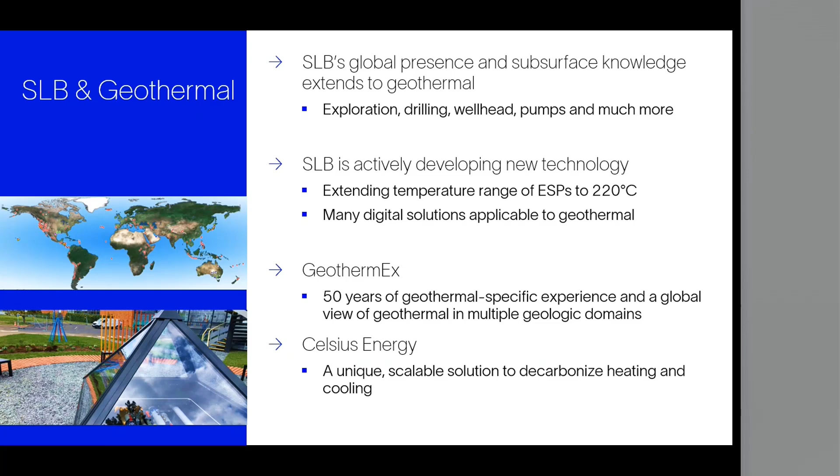We have a sort of sister company that spun up a different way. It was started by some Schlumberger employees, called Celsius Energy. I mention them because they've been working on the shallow side of geothermal, whereas GeothermEx has traditionally, historically, been more focused on the deep.

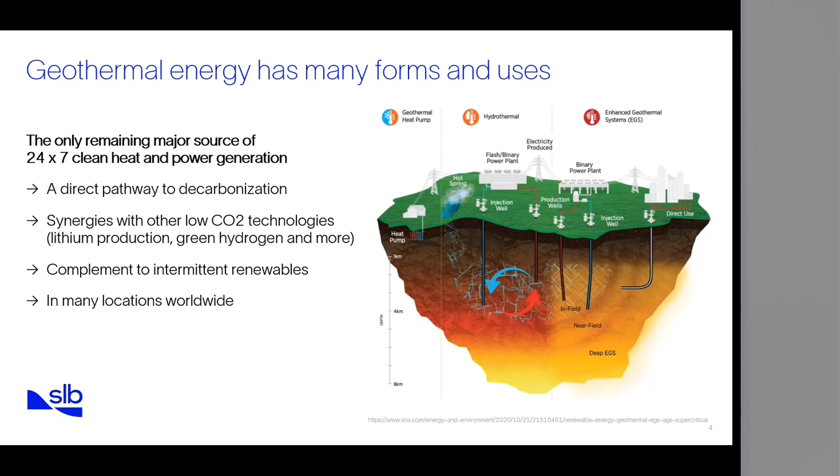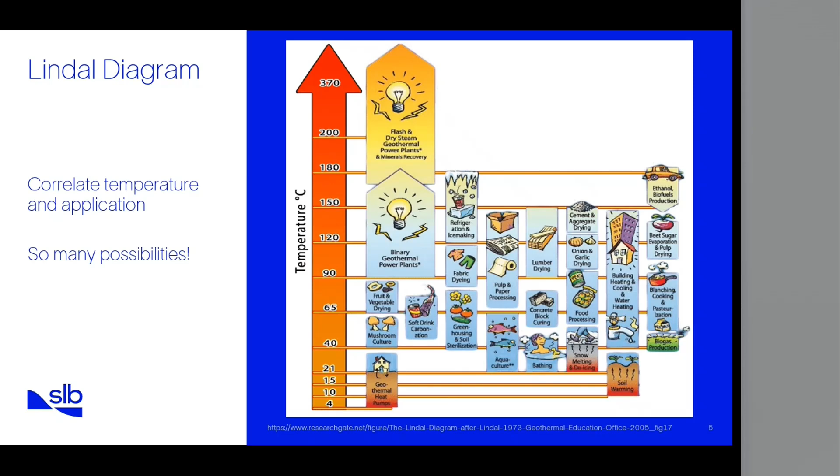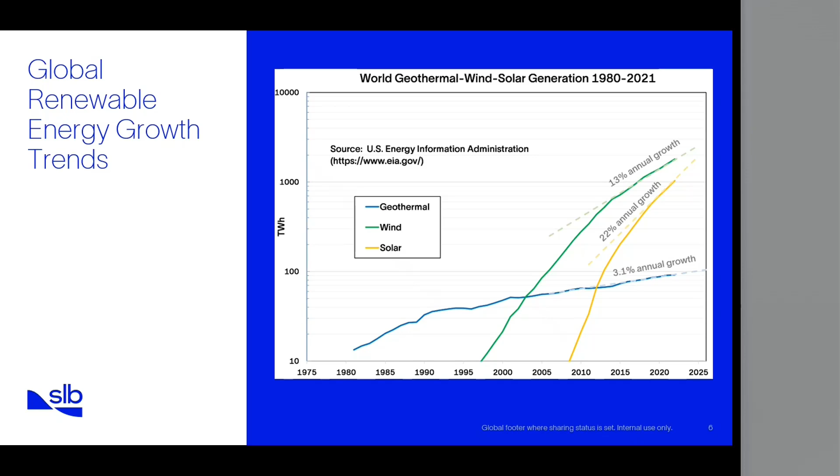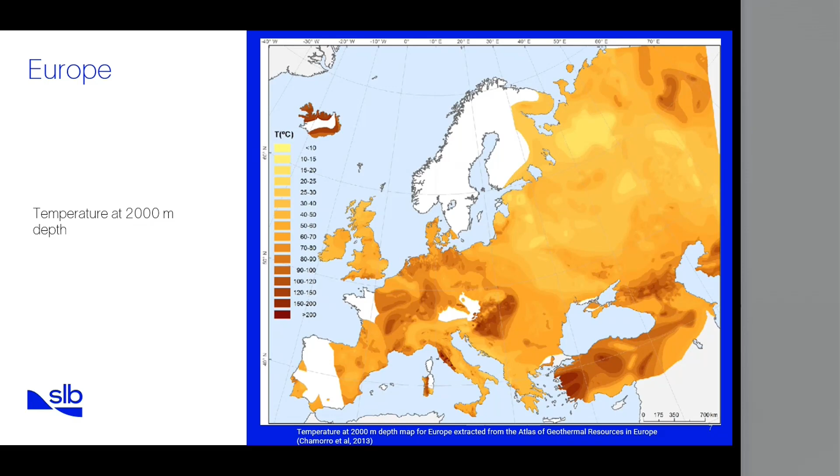So it's about the same rocks. We're not dissimilar from the continent, and yet when it comes to legislation, what we have seen is that our neighbors have taken some really bold actions to enable geothermal development.

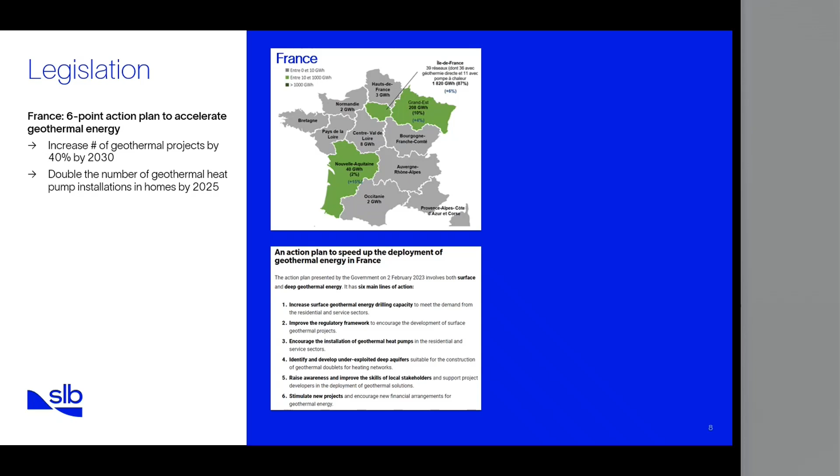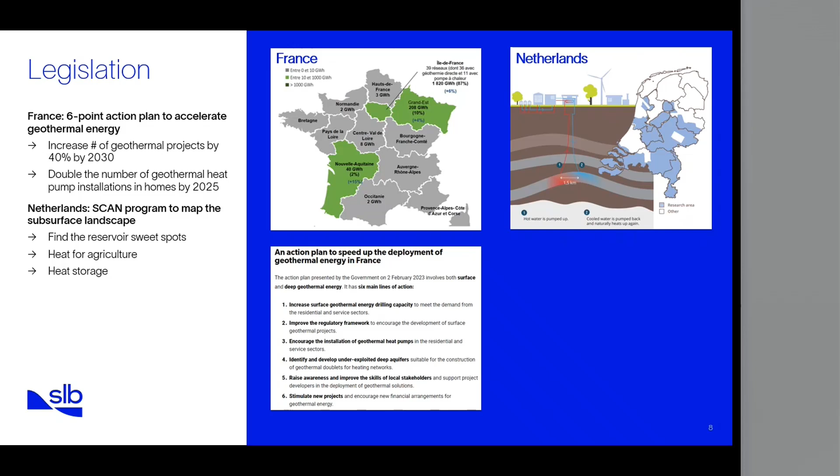In the Netherlands, that's another country that has been really active, doing a lot of geothermal development. This is showing the SCAN program, a seismic campaign of the Netherlands, where they first did a nationwide study and found some reservoirs, some geologic units they thought would be good reservoirs. They did some testing, and now they're doing mapping to find where those sweet spots are, with the intention of using that heat for agriculture and storage. They're very organized.

Germany also has committed to generate 50% of heat in a climate neutral way by 2030, and they have this 100 new projects program, in addition to already having quite a few projects on the go. This 100-well project is getting a lot of attention.

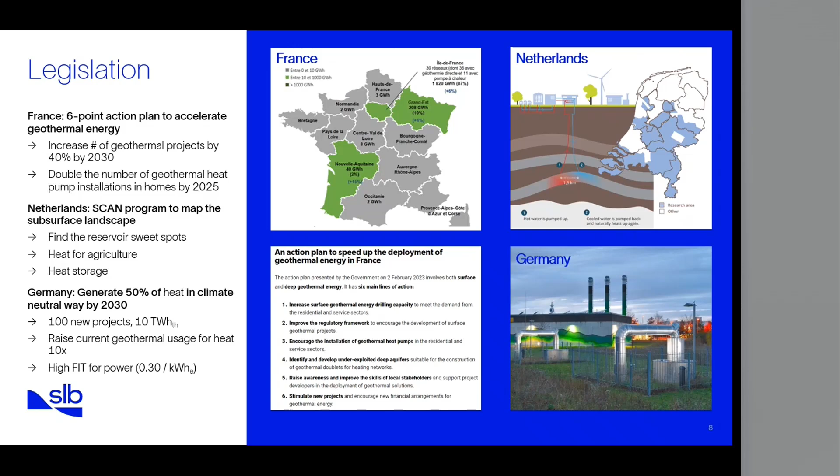So here in the UK, the legislation—we haven't seen those same things, at least not yet. What we're looking at here is just standing back, looking at the island and the subsurface temperature at 1 kilometer depth, and then the heat flow of the same area. What you're seeing here is the temperature variation through the island, but the heat flow is what jumps out, which is actually the change of rock type.

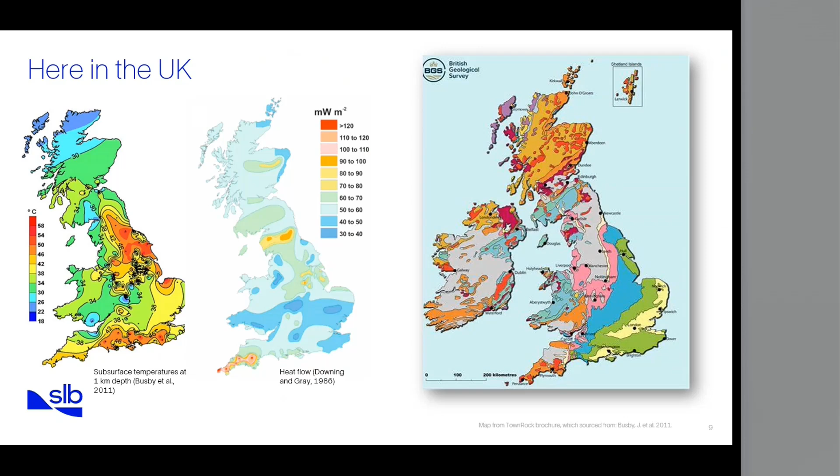That's where you have high heat flows in the granites. So the Cornish Peninsula has a high heat flow, as does the north of England and up in Scotland a bit. Then the geologic map by BGS is next to it, so you can cross your eyes and see that the units match up. You have the sedimentary basins mainly in the middle, central and southern England, and then the granites down south and up above.

So just a little bit—this is an incomplete history of the topic in the UK, but what I want to point out is that over the 50 years, what was driving a lot of activity from the late 70s through the mid-90s was this hot dry rocks program, funded by the UK Department of Energy, which is now no longer in existence.

That Department of Energy actually worked with the US Department of Energy, and they had this big program in Cornwall to experiment with drilling geothermal wells, injecting cold fluid, and seeing the response in a nearby producing well, doing a lot of experimentation with that. During that time is when the first, and still only, district heating system in the UK was established—the Southampton Geothermal Heating Company, which is still going today apparently.

Then you can see there's just this dead zone from the mid-90s through the late 2000s, which is where wind and solar, everything was taking off. Nobody really seemed to care about geothermal, but then things started to pick up again.

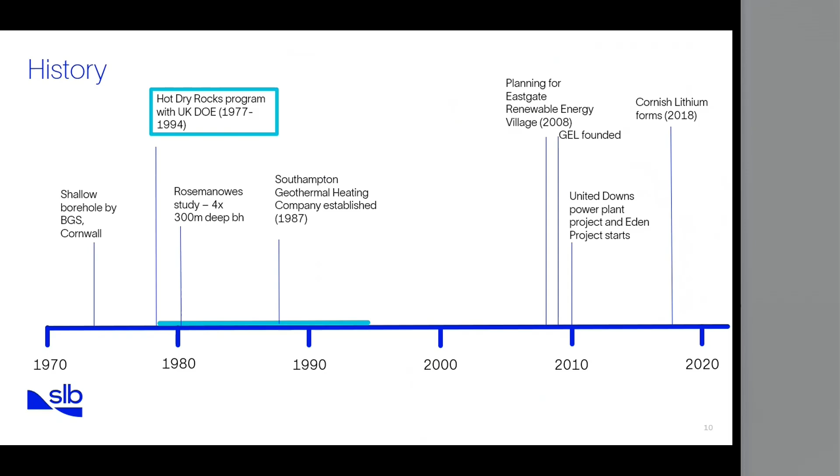Now we get into the true signs of life, where we have the lithium brines. I mention this first because it has gotten the most excitement, the most publicity, and there's a lot of energy around it. It's a really exciting frontier, especially in the context of energy security and the move to electrify everything. It's a crossroads of a bunch of different factors coming together.

So we see activity with geothermal lithium in geothermal brines down in Cornwall, also up in the north of England. And then there's always this knowledge sharing that goes back and forth with the Rhine Graben, which is between Germany and France.

A lot of the projects go back to the Hot Dry Rocks days, because that program ended up moving to the Rhine Graben. So the expertise with brines and geothermal in this type of granitic setting has been kept alive and incubated over in Europe, and now we're getting it going here in England.

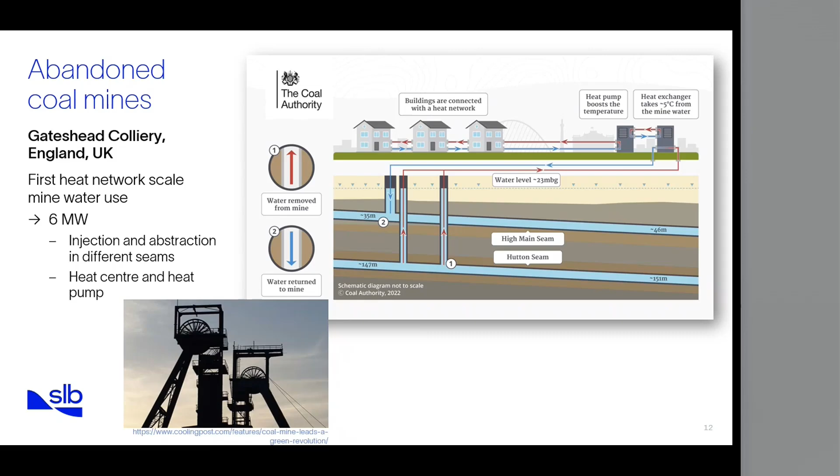I found out that they've started a second project up in Sunderland at the football stadium, where there happens to be an abandoned mine just on the grounds. So they've started this heat network at scale using this old mine water.

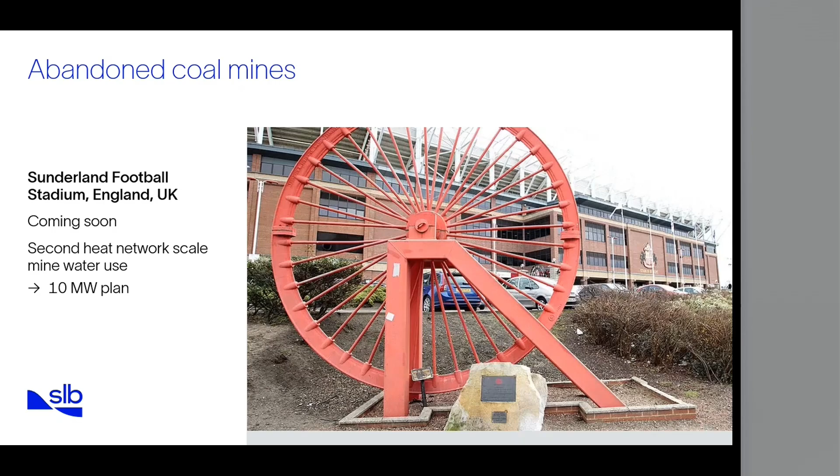Along the same mine water knowledge base, one of the PhD students developed this map of Scotland, and it's just been published. Even though we know about the Gateshead colliery and the Sunderland one that's coming, this is actually taking it to scale.

How many mines are there? Where is the water level? How easy is it going to be to make it useful? I'm also told that the Welsh government approached the Coal Authority to do the same thing in Wales. So that's quite exciting, and that's the mining story.

Then we also have a bunch of development over in the hydrocarbon world, the old oil and gas sector of the UK, where most of the expertise and activity is really on the offshore oil and gas, but there's actually a bit onshore. I've listed some of the companies who've been active in this sector, and what they're focused on is repurposing oil and gas wells.

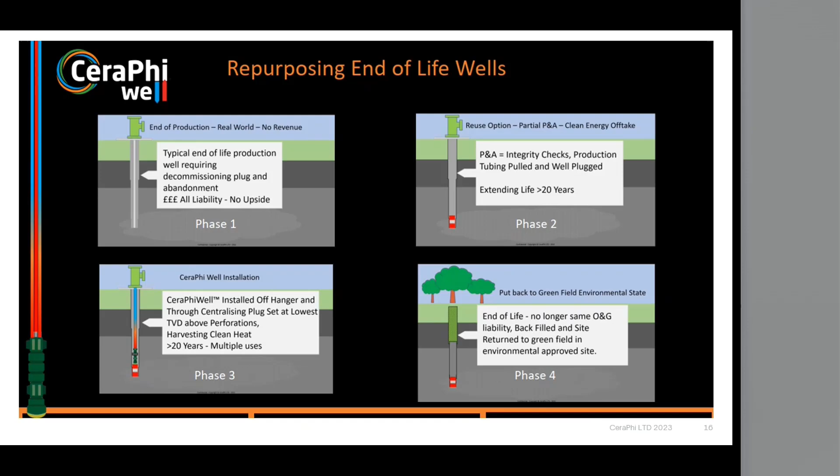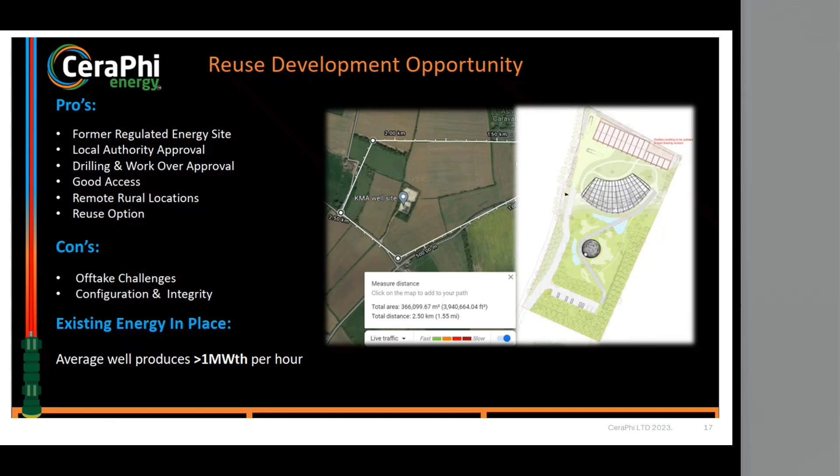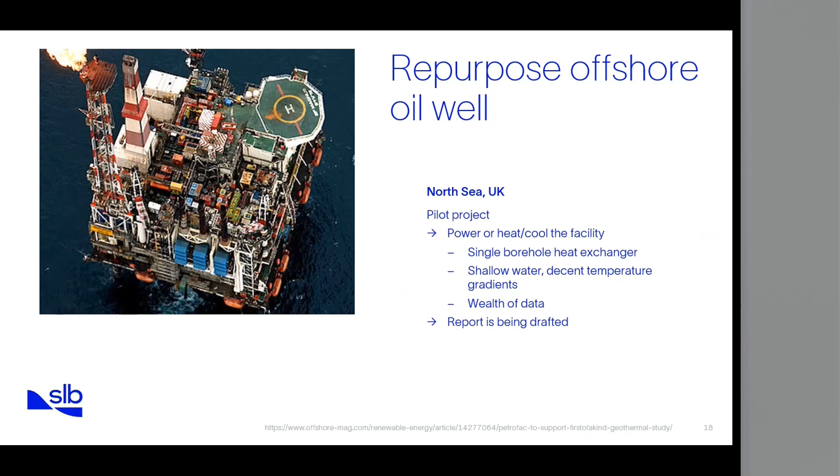So this model is really interesting, and they have some field trials going on right now somewhere in England. So this is definitely a sign of life. It's this whole direction of repurposing hydrocarbon wells. There's also this idea of repurposing offshore oil wells, to see if it works, maybe provide power or heat and cool the facility itself, even though it would also be producing oil from its wells, but convert one of the wells to geothermal. So that's a live pilot project right now in the North Sea.

Outside of those two industries I mentioned, we also have government bodies of science and innovation, like the British Geological Survey, where they're doing important things too. They just did this mapping project where they found all of the, I don't remember exactly how they did it, but they mapped the Carboniferous limestones, because they believe that's similar to the Dutch example, where they honed in on this particular reservoir, tracking this unit across the country and finding the sweet spots where this layer is at the right depth to have the right conditions to exploit. That's what it sounds like the BGS is doing right now, which is really exciting.

And they are just in the final stages of publishing this UK Deep Geothermal Energy White Paper, so that's kind of a coming soon thing. And thirdly, they're reworking legacy data sets. This is really important, and it's another trend we see, another powerful avenue to pursue that's going to require geoscientific knowledge.

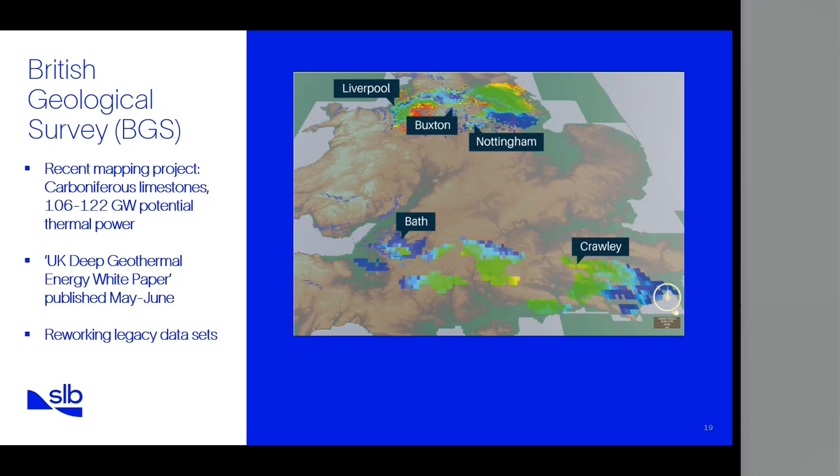In addition to BGS, we also have these UK geoenergy observatories scattered around. There's two main ones: the one up in Glasgow, which has 12 boreholes, and then the Cheshire site. And then there's something in Cardiff that's more focused on urban geothermal heat exchangers and the water flow in an urban setting with regards to geothermal heat recovery. So that's also cool.

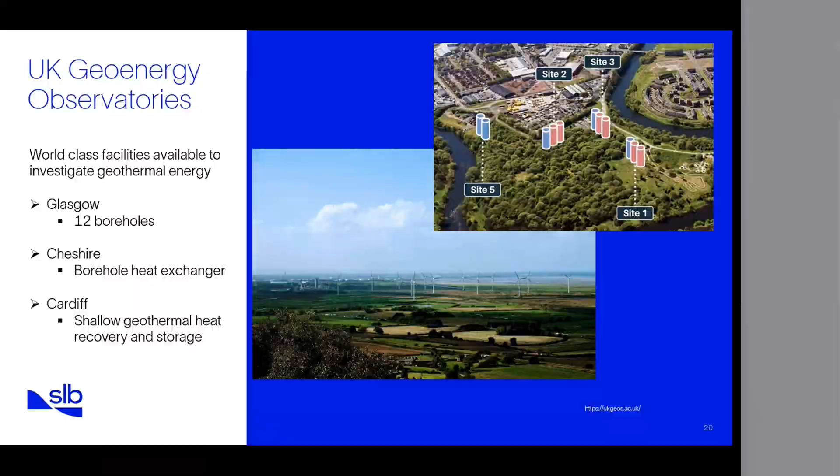And then there's the Net Zero Technology Centre up in Aberdeen, which I think about 6 months ago decided to start this National Geothermal Innovation Centre. It hasn't gotten off the ground yet, it's just been planning meetings and interested parties getting around the table to talk about what it should do and so forth, but that's a great sign of life.

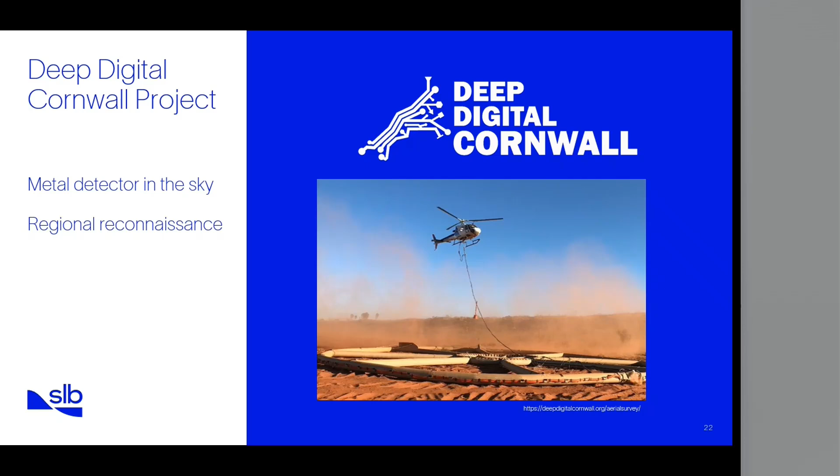And then this was interesting: down in Cornwall was this airborne EM reconnaissance survey that they did. It was on the BBC News, this metal detector in the sky showing this helicopter flying. I think it flew at 80 meters above the ground, collecting airborne EM data that gives you information about variations in conductivity, and you overlay that with the geology to get a different measurement of the Earth that's difficult to get otherwise. So that's a really inspiring little project.

And then we have the whole world of building, heating, and cooling. This example is the Celsius Energy flagship project, which is actually in France, but they're in the process of converting one of the UK technology centers to also have this design, which is a splay of boreholes that come underneath, and it's all the transfer of heating and cooling and heat pumps and building temperature regulation. This is really exciting.

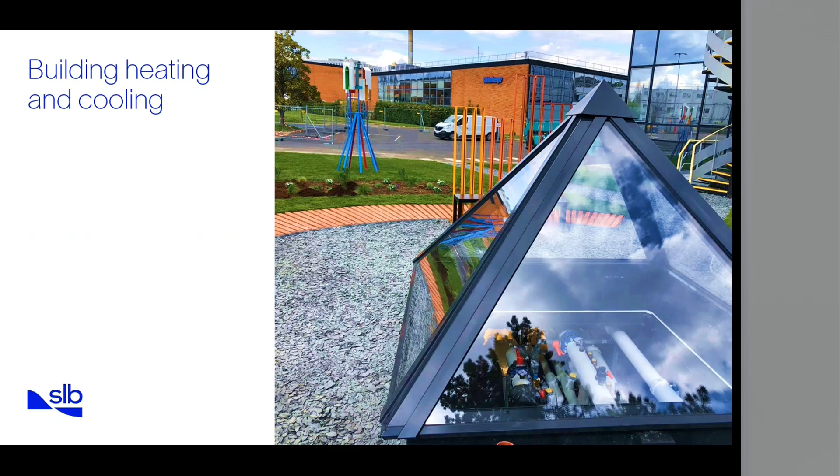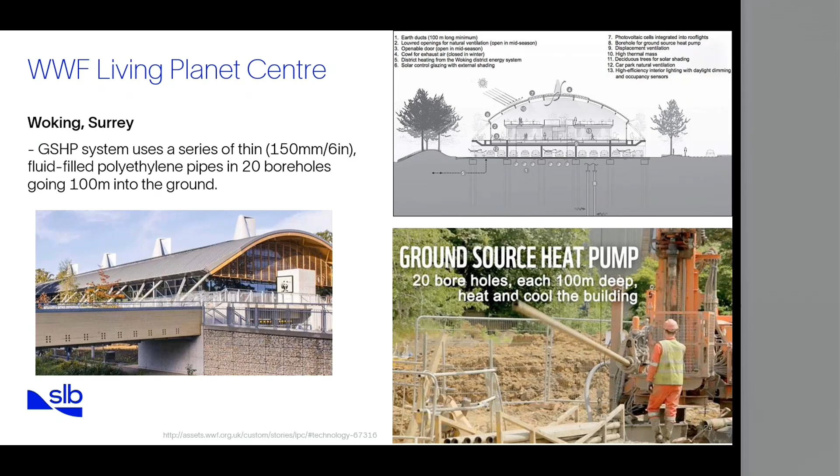It's not that unique in a way, because ground source heat pumps have been around for a long time, and there are other examples of buildings using ground source heat pumps in a deeper or smarter way. So this World Wildlife Fund - not World Wrestling Federation, that's something else - Living Planet Centre in Woking. I don't think it's actually open yet, I think they're still in development. Maybe somebody here knows more about it. But this caught my eye as a great example.

And then we have this fun idea by Town Rock Energy of just taking dancers' body heat and storing that, using it to ventilate or provide heating and cooling in the building. So that's actually live, it came online in, I think, October last year, and someday I'm going to go there. That's my next trip.

And then there's this one. This is the first geothermally heated pool of its kind in the UK. I'm hoping my village will decide to do this, but we're not on the coast. This one has seawater come in, and then they heat it geothermally with a single geothermal well. I think this picture is maybe a little misleading - I don't think the whole pool is heated. They have a couple pools: a big pool, and then a geothermal pool. But you can buy tickets and go swim, and it all sounds like a really good idea.

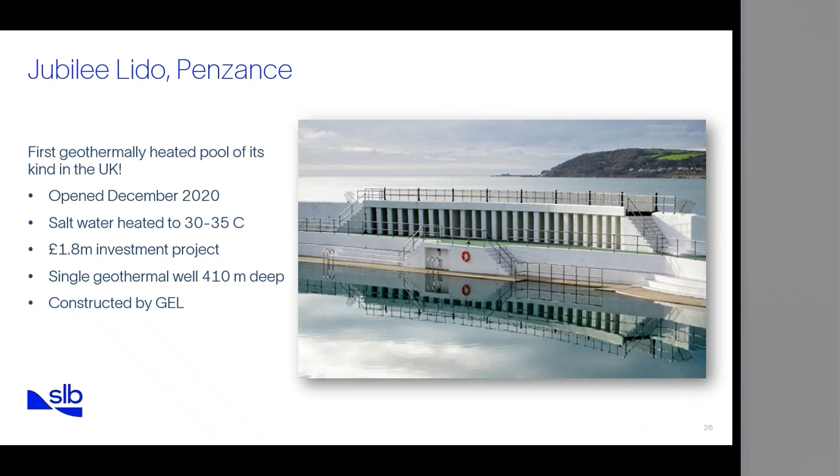Then there's the Eden Project. The real Eden Project, the first one in Cornwall, has been drilling geothermal wells to provide heating for the facility, the main biome complex. That project is still ongoing, but now they're talking about Eden North. This is coming, this is a rendering - it's not open yet, but they're considering including geothermal heat in the same way as Eden South.

Then this is such a beautiful example, and this is really where I hope the country goes. This is where a village has made the decision. They got some funding a few years ago, and it took a few years for them to get here, but they have this energy center with a geothermal heat pump, combined with a solar farm and I think an air source heat pump as well. They're providing heat to 300 homes, 2 churches, 1 pub, and 1 school. Not all of those have received the heating yet - it's kind of a ramp up, but it's working.

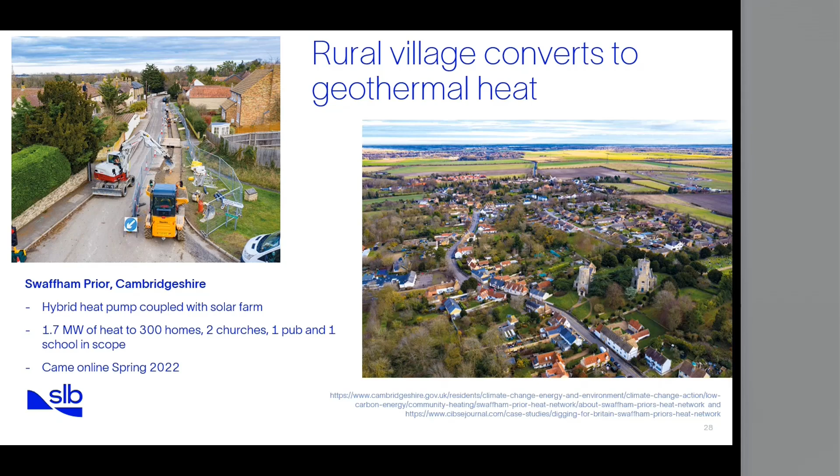This resonates with me because this is the kind of village I live in. Everyone has heating oil, a big old tank outside. It's really expensive, and the gas lines don't go there, so there's no other option. Having an energy center that is able to get the buy-in of the residents and decarbonizing - this is the real opportunity.

We have the net zero goals - everyone's said these things are okay. The government has said all buildings need to be decarbonized by 2050. How are we going to do that? When you look at the emissions, just heating in general, I think it's 40% of the emissions in the UK come from heating buildings. So that's the real opportunity here.

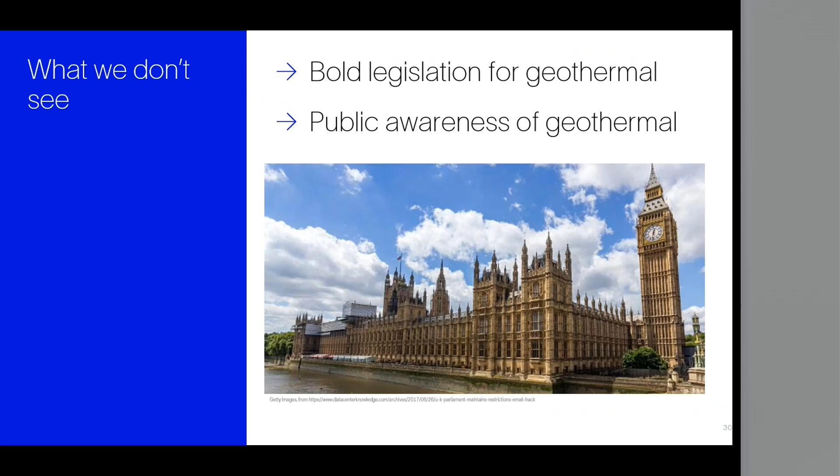So I've spoken about what we've seen, the signs of life. What we don't see is bold legislation in the way that we see in our neighboring countries over on the continent. And also, nobody knows about it still - you mention geothermal and people don't know what it is. Somehow that needs to change.

But we've had a success story in the past, and that's with UK offshore wind. This story started out quite slow, but then as soon as the government got involved and had some government and industry collaboration, the turbines got bigger, the projects got bigger, it grew exponentially, the price came down over time, and the jobs went over there - it's just a great story. So it's totally possible to do this, but it takes a little something extra, and government involvement is really important.

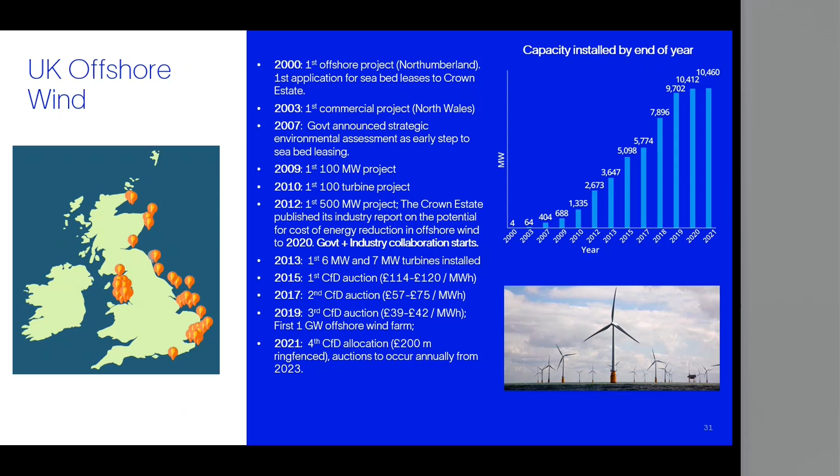So what I see in these signs of life is there's something around place, actually, because geothermal energy, heat and power, is really specific to the piece of earth that you're standing on. But with technology and solutions today, you can make anything work - you actually don't need to be standing on steamy ground in order to make it work for you.

So there's that. It's everything to do with the place on earth where you live and the communities and the people right there. That's different from mining, hydrocarbons, even water, because you can transport those, they're commodities, but heat for people on the ground is different.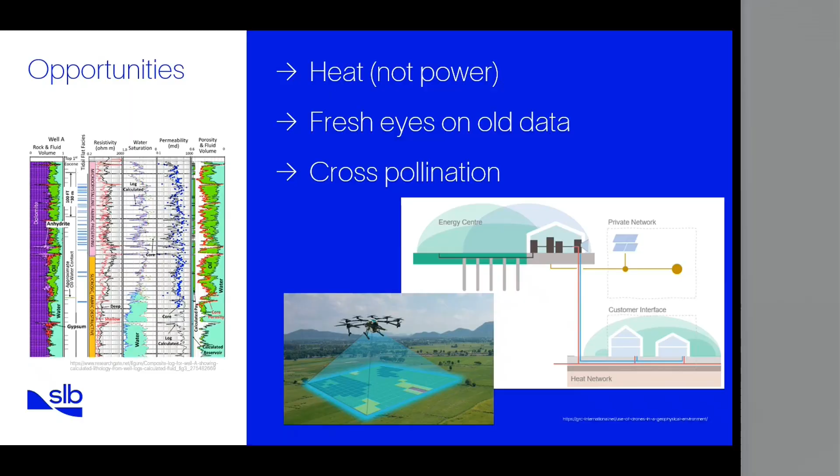So there's hope, there's loads of signs of life. We know that we can spin things up in the UK, like we did with offshore wind. There is this all-party parliamentary group that's being formed for geothermal. There's probably people in this room thinking of joining that group - if you don't know about it, speak to me afterwards. And that's starting to go, and that's the proper way of doing things with parliament and government.

At the same time, we're in this really interesting space of what feels like quite a national identity and confidence crisis. We have Brexit, and the different nations of the British Isles want to - there's talk about splitting up - and then we have the high prices, and a lot of things that don't feel like they're working particularly well. And I think there's really an appetite to fix that, an appetite for bold change, as I say.

We still have the situation where nobody knows about geothermal yet. And I had an idea the other day, which is Clarkson's Farm. I think if we could get Clarkson's Farm - if anyone knows the producer or has contacts - if we could get a season going where he converts his farm to renewable energy and is able to get geothermal going. I don't know who else has been watching Clarkson's Farm, but I learned so much about farming watching that, I didn't know anything. So call me or talk to me afterwards if you know the producer of Clarkson.